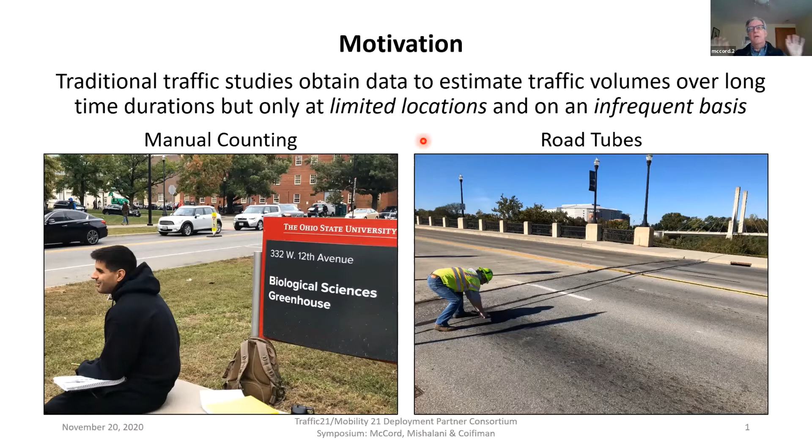The motivation for this project is traffic volumes - how many vehicles are on your roadway segment - which are used for a variety of transportation planning and operations applications. In the traditional way we do it, we either put a person out by the side of the road to count vehicles as they go by, or we stretch out a road tube that counts vehicles as they go over it, getting data through time, but only at very specific, limited locations, and only on an infrequent basis. Buses, on the other hand, go all over your urban network, so they have the potential of being sensor platforms that can get information on traffic all over the city, not only at specific locations.

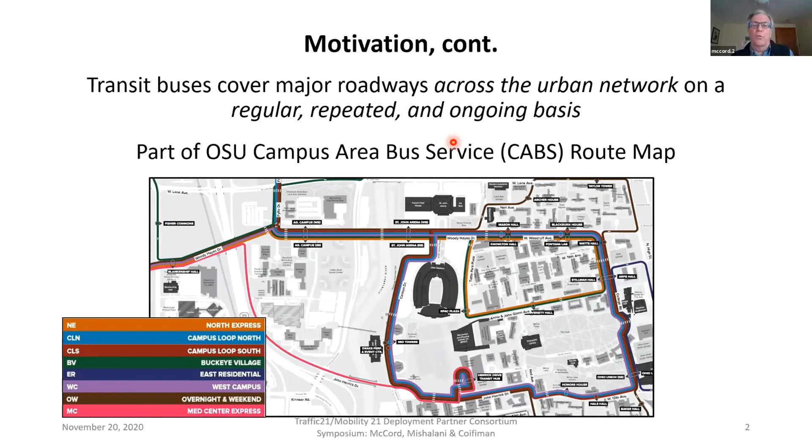But of course, because they're moving, they're going to get very short duration observations. The nice thing is that transit agencies are putting cameras on their buses for other purposes - liability, if there's an accident, who's at fault; safety, if there's a hijacking or something, can we see someone. We came up with the idea that since those cameras are already out there looking outside the bus where we see vehicles, can we take advantage of this information that's already available in this imagery and turn it into traffic volumes?

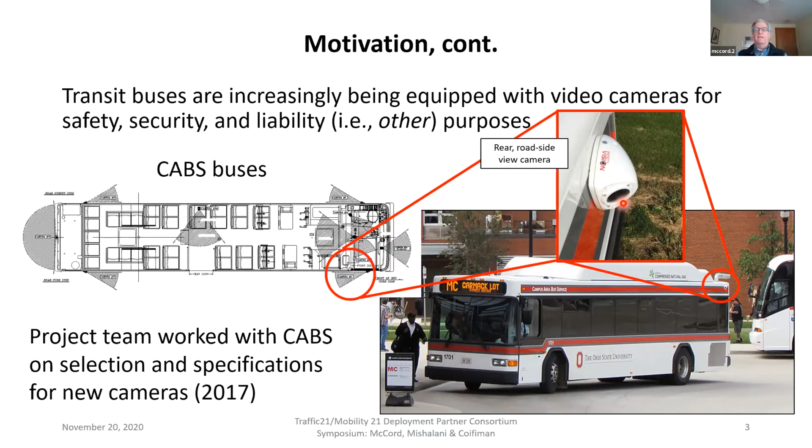We don't have to pay for the sensors, we don't have to pay for the platforms - it's already available. So the idea is to take advantage of this available video imagery to estimate traffic volumes across our network on an ongoing basis.

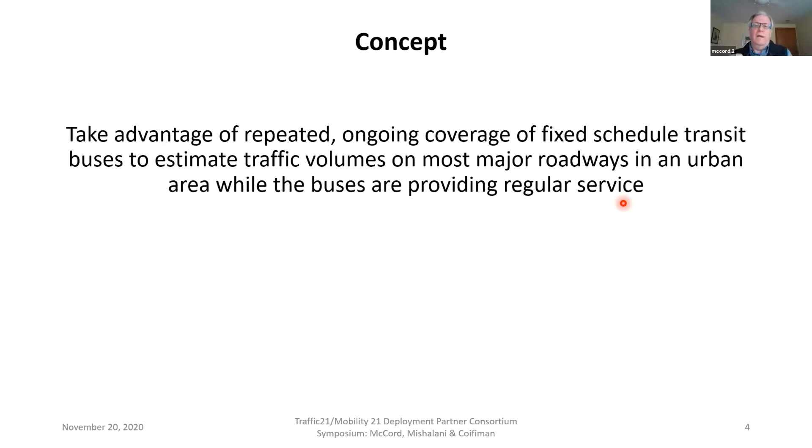That concept's somewhat straightforward, but let's just see if the project's about, does it work?

In the literature, they called it a moving observer, but we had to modify the traditional approach to work for our application, where buses go one way, vehicles go another, and buses then go elsewhere and only come back much later. So I'll go through our first-cut simple methodology to estimate, from one bus pass over the roadway, how many vehicles per hour we'd estimate at that fixed location. We have a simple approach, and our research is about fine-tuning it.

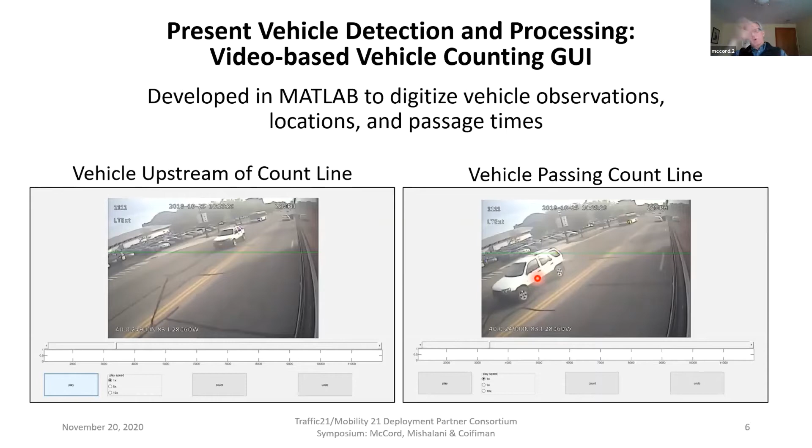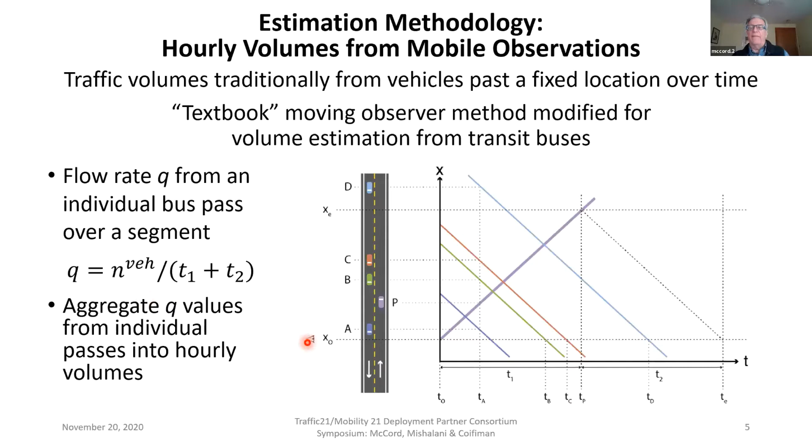How do we do it right now? Well, these are images from the bus, and we see the vehicle coming. We've developed a simple GUI, a graphic user interface, and when the vehicle passes, we just click it. Then we have all these clicks that we convert into the information we need for our estimate of how many vehicles are passing a spot on the road per unit time, which is our estimate of volume.

We've done several empirical studies. I'll illustrate with this one: a network across the Ohio State University campus. We get the imagery from OSU buses, we have good relations with them, so they give us the video. This was from October 2018. We repeated in 2019, and we're repeating it right now in 2020.

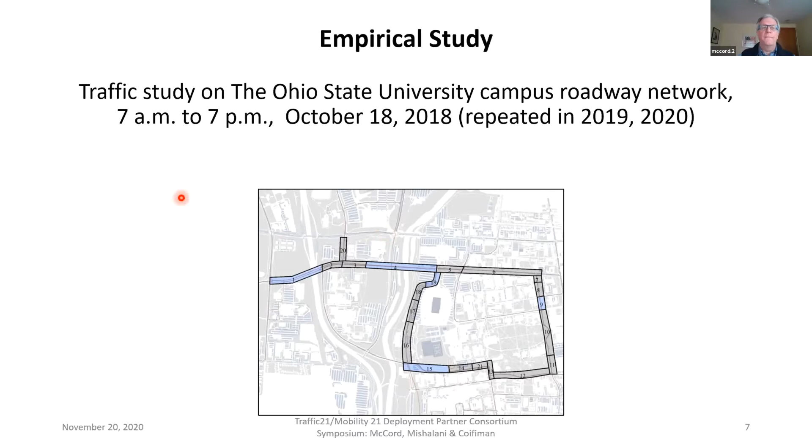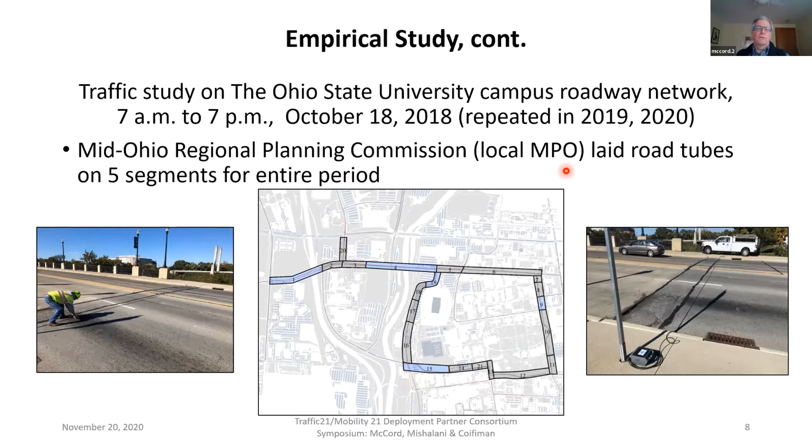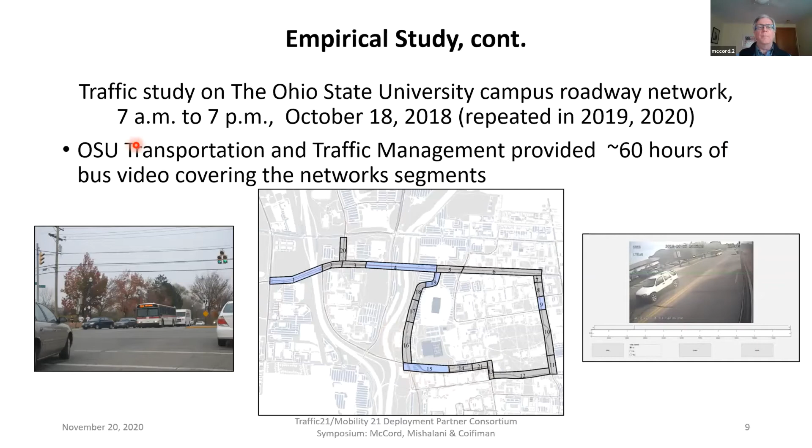Volumes from 7 a.m. to 7 p.m. The MORPC, the Mid-Ohio Regional Planning Commission, our local MPO, Metropolitan Planning Organization, laid road tubes out on several segments of our roadway. We had buses going all over this roadway for this 12-hour period, and we converted the bus imagery into our estimates of volumes.

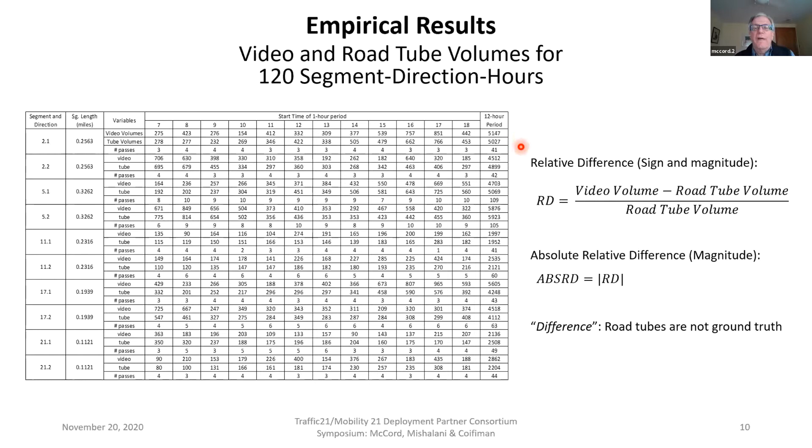We did that for 10 different segments and 12 different hours, so we had 120 comparisons. We also looked at how many vehicles traveled on this segment over that 12-hour period, and we got 5,147 from our video versus 5,027 from the road tubes.

We calculate how different they are, and the moral of the story is, if we look at the specific hour, they don't do that great, but if we look at the 12-hour period, it looks pretty good. We're getting close to about 10% differences, which is what people in traffic monitoring usually target.

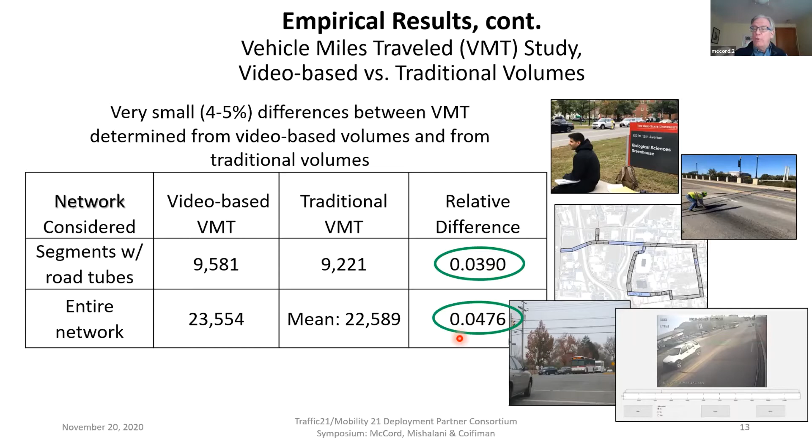Some segments do a lot better than others, and we're looking into those proportions now. Vehicle miles traveled tell you how many vehicles travel on your overall roadway segment or network. When we do that, we're getting down to only about 4-5% errors, which is really pretty good.

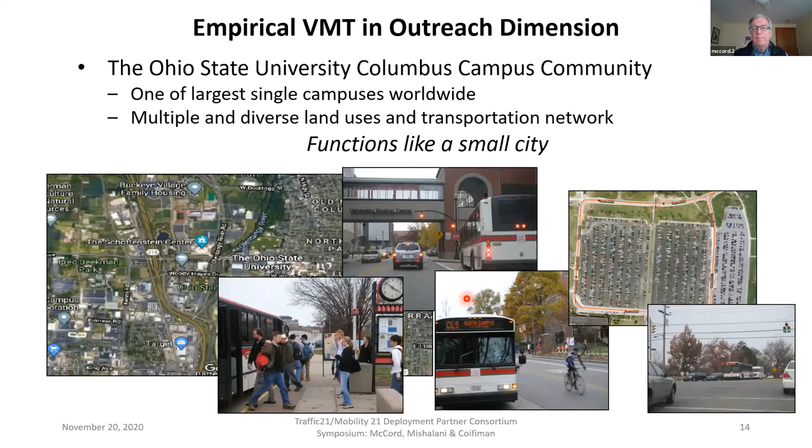In addition, we use these vehicle miles traveled estimates and give them to the OSU planners and operators so they can do their sustainability modeling, which we do on an ongoing basis. We can talk in the breakout room about the ongoing research components we're looking at, including whether we can do the vehicle detection automatically. You can read the summary, but basically we've got this method, we've got results, they're looking pretty good, we're trying to improve it, but we're also using the results now in an outreach function.

So I'll stop there and turn it back to Lisa Kay. Or is it Carly who's taken over here? Nope, you still have me, Mark. Okay, good, so much for that.

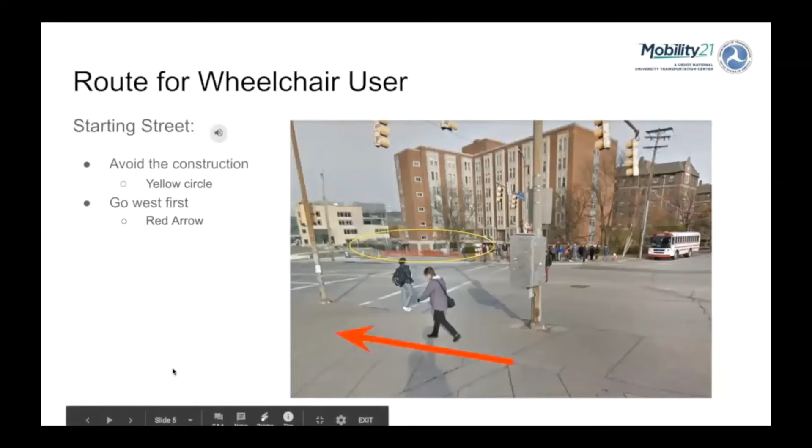Go west on Forbes Avenue towards South Craig Street. So the system asks the user to go west first instead of crossing the street here. Once we have walked to South Craig Street, and then crossed the street there, we can now safely cross the street.

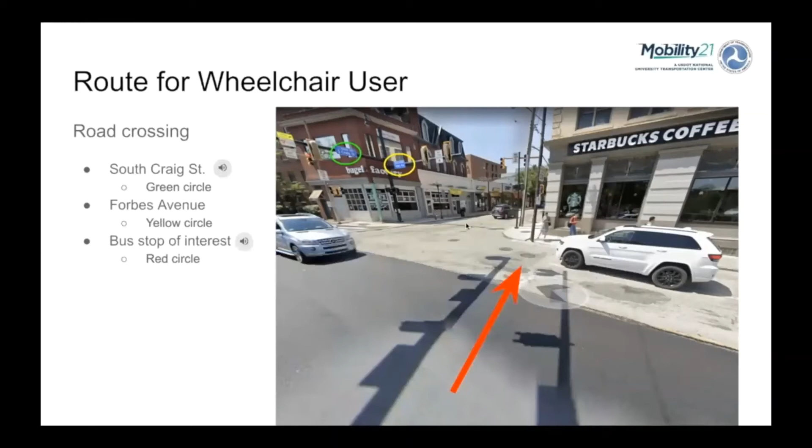Next, you should turn right on Forbes Avenue. Then after crossing the street and turning right, we are at the bus stop.

This accessibility information used to be only available on a graphical user interface. We did a lot of modifications to incorporate this information into audio format. This includes using natural language generation techniques to transfer information that is structured data into natural language representations. We also did address conversion to and from geographical coordinates and resolved abbreviations and acronyms in addresses so that they are more understandable over the phone.

So after all these changes, we have delivered a system that can be used over the phone by users with various mobility issues. Now the walking routes are more accessible for visually impaired users, and other users can focus on using their wheelchairs, scooters, and walkers while navigating themselves.

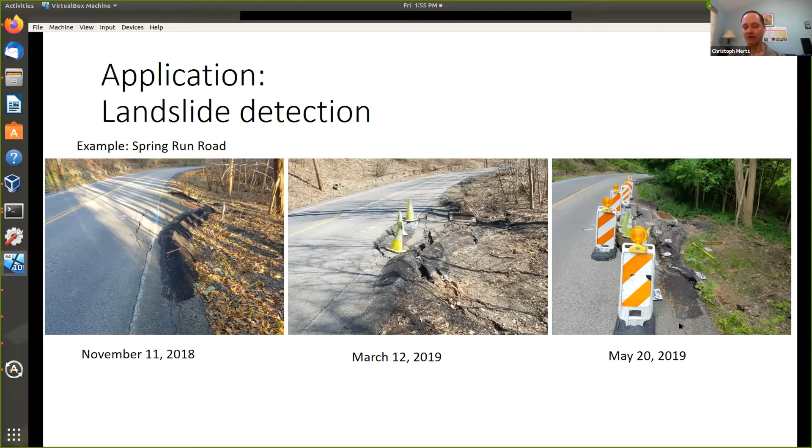Here's an example of one area which I go to regularly to take pictures and see how this landslide develops. You see it over several months, from just some cracks parallel to the road, to it actually cracking so bad that they had to put big signs up so that nobody is driving over it. So this is something we also want to do on the bus: observe areas where there might be landslides, and then do early warning, or if it happens very quickly, do a post-event analysis.

So those companies send out their cars with laser scanners and cameras to create these maps. It's very expensive, but the maps get outdated very quickly, so you need to constantly update them. It would be way too expensive to continuously drive with those expensive cars just to update it.

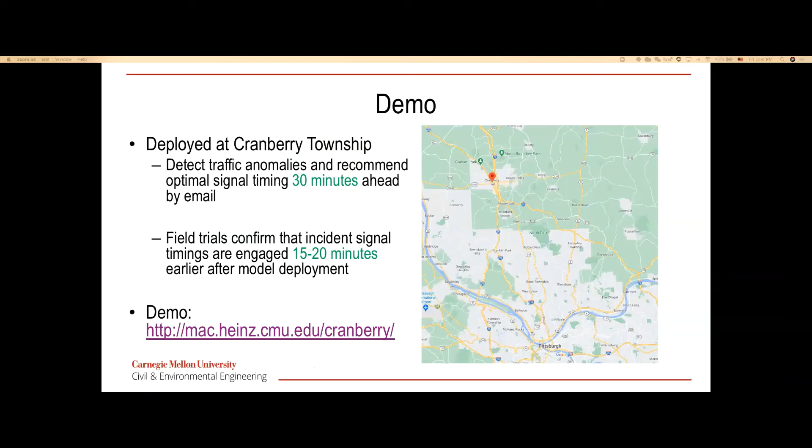Just a one-minute warning for you. So the second approach we apply for the Philadelphia region is a physics-based simulation model. We can incorporate machine learning into different hierarchies in this model, from origin-destination estimation to traveler modeling. We've developed an interactive dashboard for TMCs to optimize their DMS messages shown on the highway.

This is actually my last slide. I want to thank you all for staying with me, and we look forward to collaborating with more deployment partners to apply our research to develop infrastructure systems in the US.